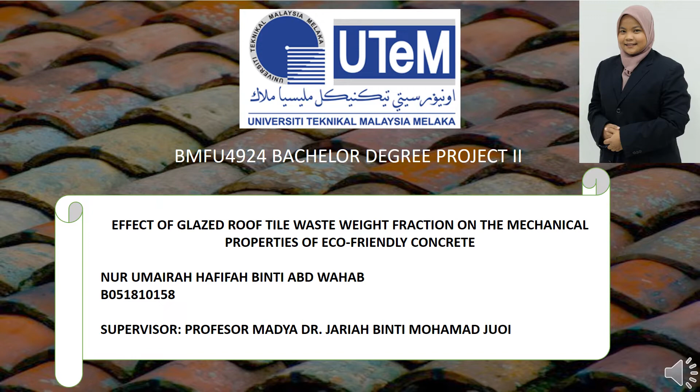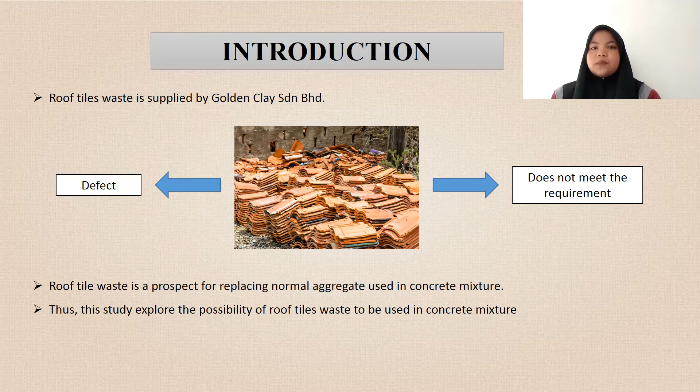Roof tile waste is supplied by Golden Clay Sdn Bhd. The company participated in this project because it is surrounded by piles of roof tile waste, which occur when the roof tile has a defect or when the final product does not meet requirements. Because of that problem, roof tile waste becomes a prospect for replacing normal aggregate.

Therefore, this study explored the possibility of using roof tile waste in concrete mixture. For roof tile waste to replace aggregate in the mixture, it should contribute to the standard performance of the concrete. To replace sand with other material as fine aggregate, characterization of raw materials such as sieve analysis needs to be obtained in the mixed ratio, because waste is not directly ready or prepared to replace the material for fine aggregate.

Characterization analysis such as XRD, XRF, and SEM were performed to ensure that the roof tile waste is suitable to replace aggregate. This helps to understand how the qualities and properties of recycled roof tile waste aggregate affect the concrete mixture.

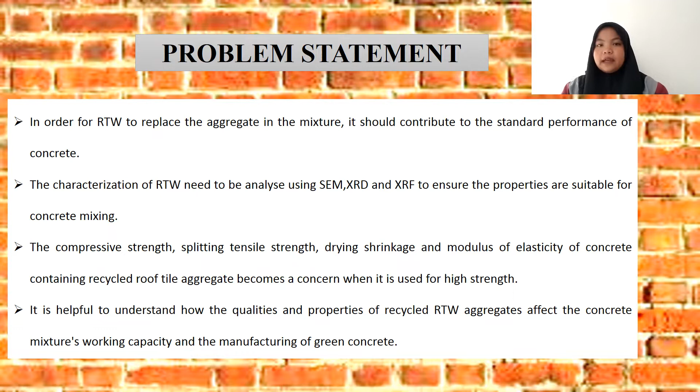The objectives of this project are to characterize and analyze the physical properties of roof tile waste for replacing fine aggregate in green concrete, to analyze the mechanical properties of green concrete produced using recycled roof tile waste as fine aggregate, and to characterize the microstructure of green concrete produced using roof tile waste.

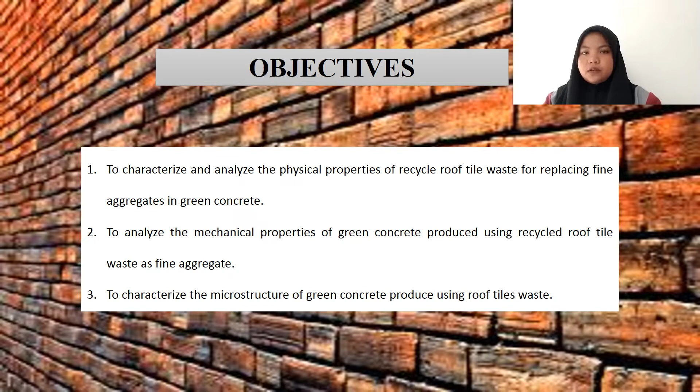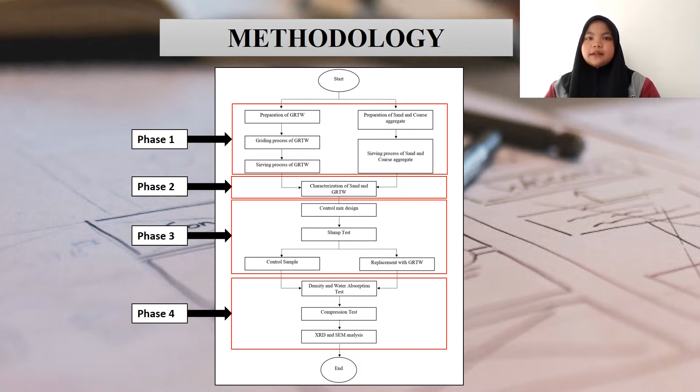The methodology for this project contains 4 phases: phase 1, preparation of raw material; phase 2, raw material characterization; phase 3, mixing process; and phase 4, concrete analysis.

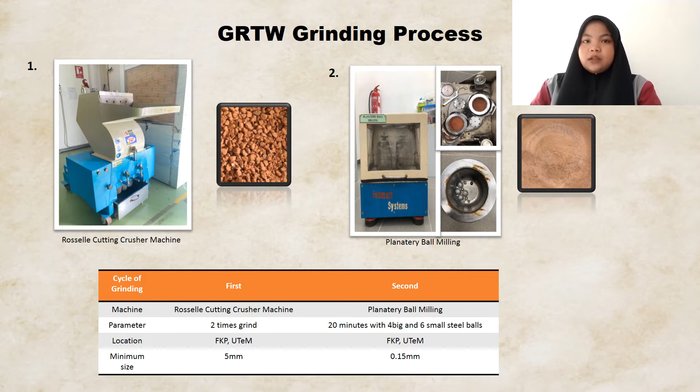Two cycles of grinding are required to generate fine aggregate in small size. The first cycle was done with the Rosselle cutting crusher machine, used twice to grind to 5 mm size. The second cycle used planetary ball milling to reduce the size from 5 mm to 0.15 mm in 20 minutes using 4 large and 6 small balls.

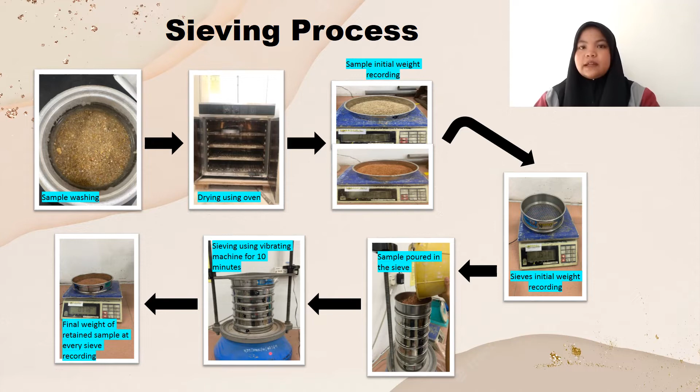The sieving process starts with washing the sample, only for sand, and drying in the oven. The initial weight of sand, GRTW, and all the sieves was recorded. Using a sieve machine, the sample was poured into the sieve and vibrated for 10 minutes. Lastly, the final weight of sample retained at every sieve was recorded.

The mix design process was calculated using the BRE (Building Research Establishment) method. Grade design M24, type OPC cement, and fine and coarse aggregate are the important data that must be collected. Water-cement ratio and water content were the reference for the compressive strength and workability of the concrete mixture.

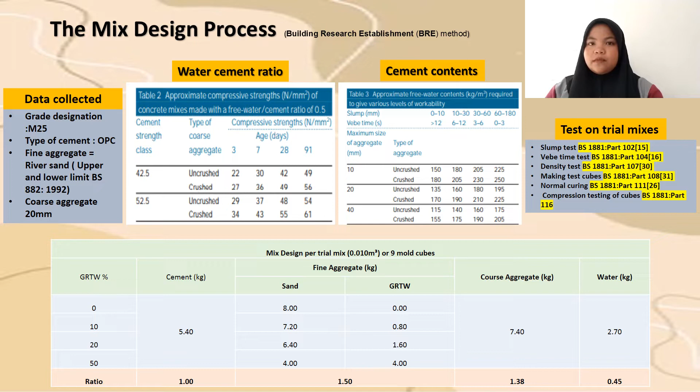All tests were based on British standard in different parts. Concrete cubes were cast on site using M25 concrete grade, with a mixing ratio obtained from the BRE method of 1 to 1.5 to 1.38 to 0.45 for cement, fine aggregate, coarse aggregate, and water respectively.

Slump tests were determined according to British standard, focusing on slump fall values of 60 to 180 mm. The volume of the slump cone was calculated as 0.0055 cubic metres. The volume used for each mixture of cement, fine aggregate, coarse aggregate, and water was based on the total quantity used.

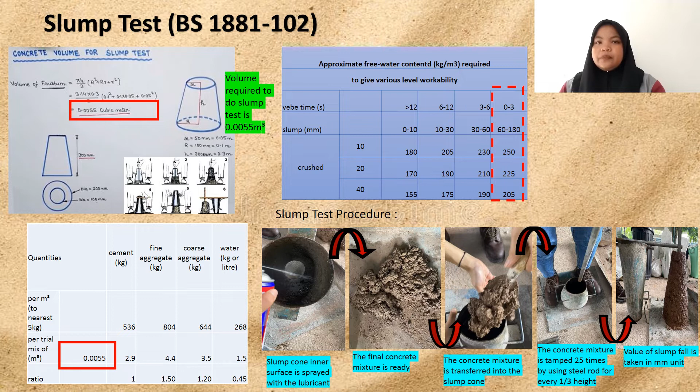The slump test began with the inner surface of the slump cone sprayed with lubricant, and 50% of the GRTW mixture was placed in the slump cone. The concrete mixture was tamped 25 times using a steel rod for every 1/3 height, and the slump fall was recorded. The steps for 10% and 20% were the same as for 50%.

For the control sample, the slump fall is 80 mm. For 10% and 20%, the slump fall values are 100 and 110 mm. For 50%, the slump fall is 30 mm. According to British standard, the 50% GRTW sample was out of range, as the acceptable range is between 60 to 180 mm.

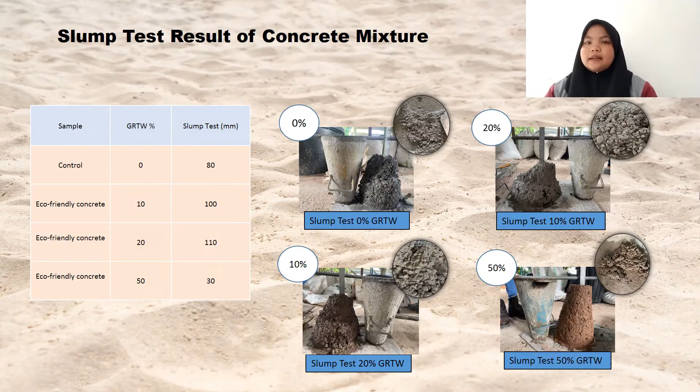The mixture of concrete was compacted into a cube mold with dimensions 100 x 100 x 100 mm, and the mixture was dried into the mold. The initial weight of the control concrete was recorded.

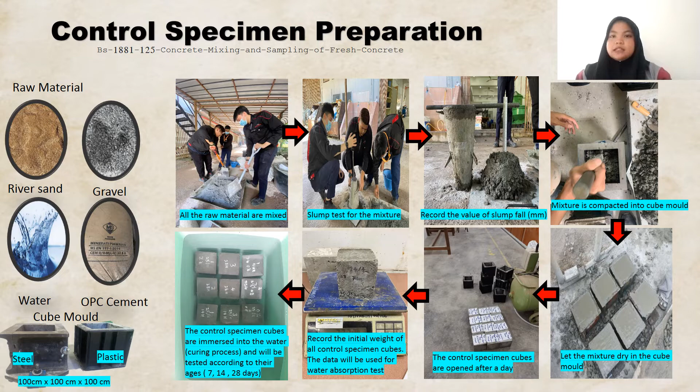The control cube was immersed into water for the curing process and tested according to their age, which is 7, 14, and 28 days. The preparation of 10%, 20%, and 50% GRTW samples was the same as the control sample preparation, but different in the mixture of the concrete. Nine cubes were made for each sample.

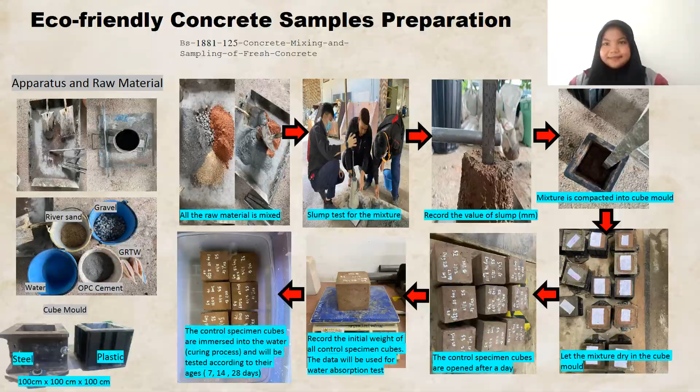The sample size of sand employed in the sieving method is 0.705 gram and the final weight is 0.704 gram. The sample size of GRTW employed in this sieving method is 0.504 gram and final weight is 0.502 gram.

In this case, the difference between initial weight of the sample sand and GRTW is not more than 0.2%. When the mass before and after sieving differ by more than 0.2%, do not use the result for accepted purpose. The highest amount of sand and GRTW sample aggregate retained is at sieve size of 1.18mm and 0.30mm, which is 33% of the total weight.

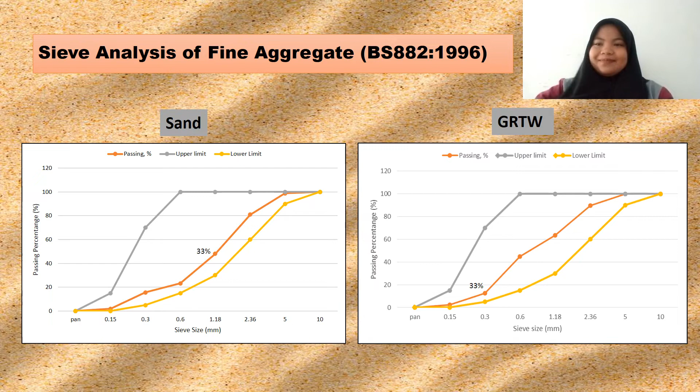Generally, both samples can be considered as well-graded fine aggregate in that it can reduce the void content. For the SEM analysis image, the GRTW sample shows some pores that existed compared to the sand sample. Surface area for sand is less compared to GRTW.

Because of its high porosity, the calcium silicate hydrate responsible for the hardening reaction has a huge specific surface area when hydrated cement hardened. Single point desorption total pore volume is less for sand than GRTW.

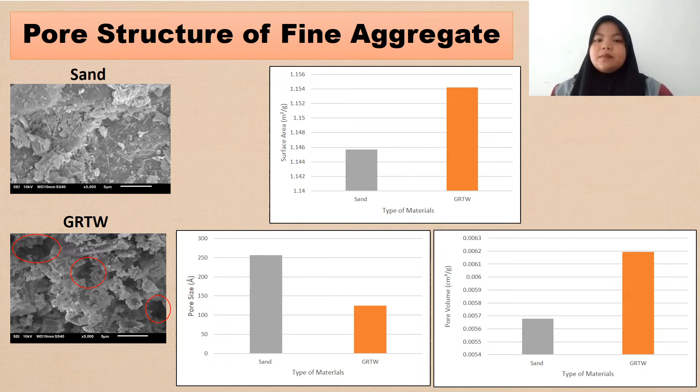Due to the bigger pore volume, the higher surface area, which is large pore size, has higher absorption capabilities as the concentrate is increased, even though the GRTW shows some pores, but in terms of pore size it is less than sand. Eco-friendly concrete water absorption and density.

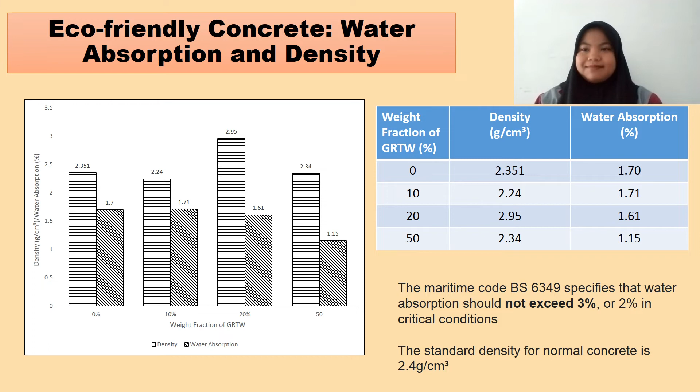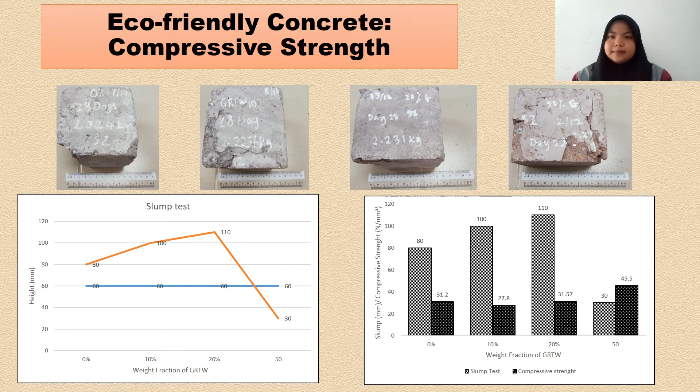Eco-friendly concrete crystalline phase. XRD analysis is the method to find mineral composition like calcium silicate hydrate, calcium aluminosilicate hydrate, portlandite, ettringite present in concrete.

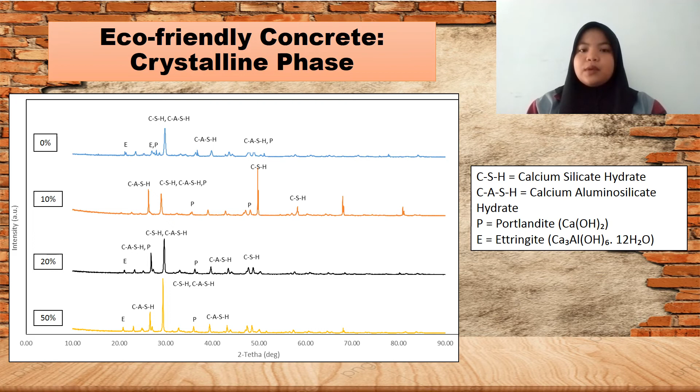The higher peak for control sample is the same as 20% and 50%, which contains calcium silicate hydrate and calcium aluminosilicate hydrate, but different for 10% of GRTW, only calcium silicate hydrate. The peak rate by the diffraction of portlandite shows the same intensity in all types of concrete. As the cement content was lower, this supports that the particle effect mixed by ceramic will accelerate cement hydration.

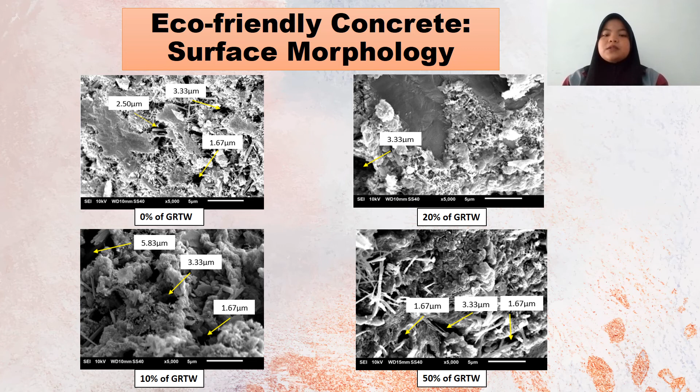Based on the comparison of the microstructure of concrete mix, it is clear that the hydration process in the mix with supplementary material was different from the conventional concrete mix. In mix of 20% GRTW, the hydration process was quite similar to the normal concrete mix, but development of calcium silicate hydrate gel in the mix was quite lesser compared to the normal concrete.

In conclusion, the grinding process of GRTW as a fine aggregate is done in accordance with BS 882:1992 standard. In terms of slump testing, 20% GRTW yields the best workability result when compared to other percentages of GRTW and the control sample.

The water absorption of concrete containing 0%, 10%, 20% and 50% GRTW does not exceed 3% or 2% under critical condition according to the maritime regulation BS 6349 standard.

When compared to the control sample and sample with varying proportion, the 50% of GRTW has the maximum compressive strength. With a 10% weight fraction of GRTW, the data pattern starts to decrease, then starts to increase with 20% and 50% weight fraction of GRTW.

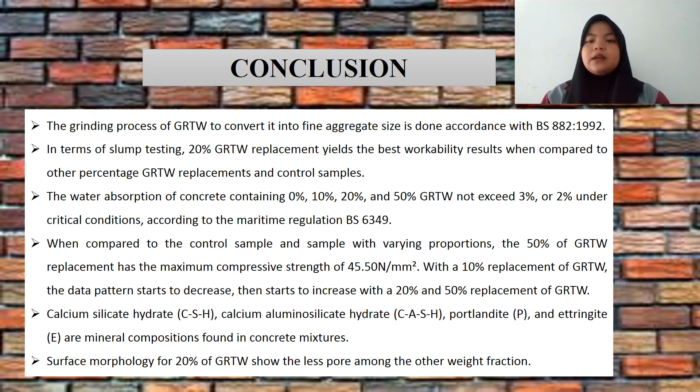Calcium silicate hydrate, calcium aluminosilicate hydrate, portlandite and ettringite are mineral compositions found in concrete mixture. Surface morphology for 20% of GRTW shows the least pore among the other weight fractions.